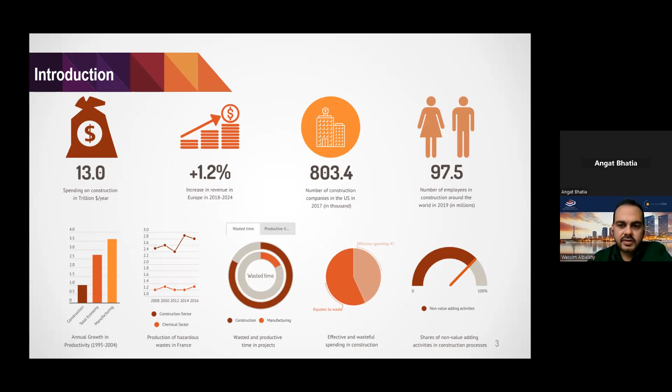So the construction industry, as everyone knows, is one of the most important industries in the world, employing more than 97 million people around the world. However, the industry itself is suffering from different problems related to low efficiency levels, the large amount of waste, and the negative environmental impact. For example, in this graph, you can see that the construction sector produces more than double the hazardous waste of the chemical sector in France, and more than 50% of the time and cost in construction goes to wasteful activities.

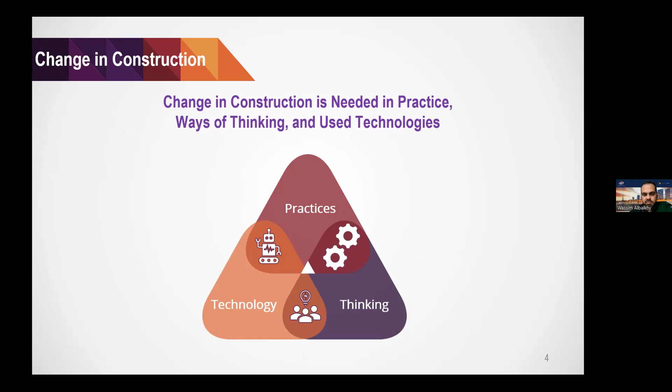Therefore, there is a need to change the construction industry in different ways: in the practices, in the way of thinking and managing processes, and in the use of technologies. These days, we are witnessing the increase of Industry 4.0 practices, and we are witnessing lean construction and 3D printing gaining popularity as two practices that may revolutionize the construction industry.

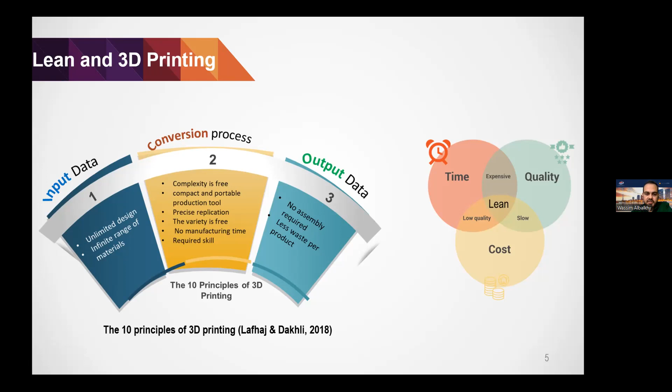From one side, 3D printing is expected to provide benefits to the industry by providing flexibility in the design, the possibility to incorporate different types of materials, and potential to decrease cost, time, complexity, and maintenance work in construction. In turn, lean is known for its potential to decrease cost and time, improve quality, achieve higher client satisfaction by creating value for the client, and achieve continuous improvement.

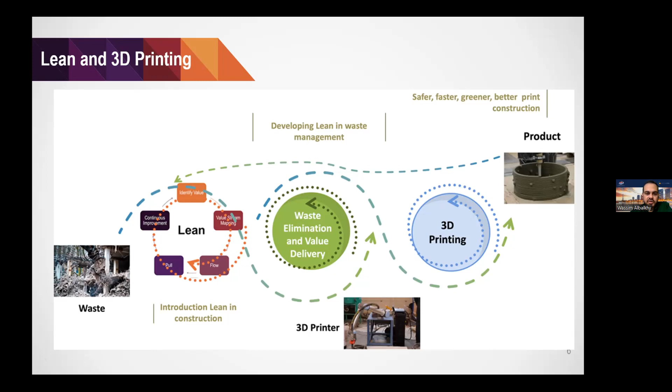In a previous study, we proposed a framework to integrate lean and 3D printing in the construction industry. We thought that both concepts can integrate with each other and benefit from each other. For example, 3D printing in comparison to conventional construction practices can help reduce a large amount of waste, while at the same time, lean can also contribute to achieving safer, faster, greener, and better 3D printing processes.

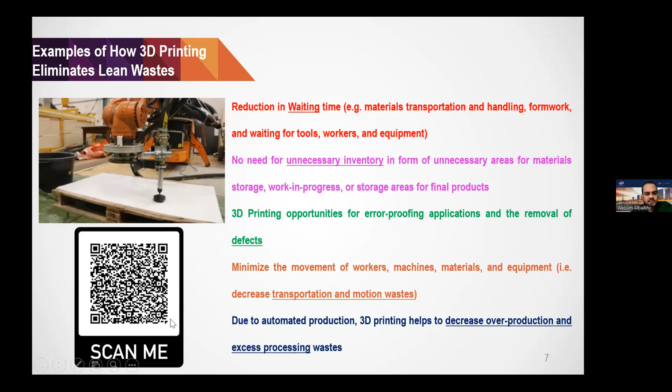In that study, we proposed different examples of how 3D printing eliminates lean waste. For example, how 3D printing in comparison to conventional construction can reduce waiting time, the need for unnecessary inventory, errors and defects in production, and minimize unnecessary movement and unnecessary transportation of machines, materials, and equipment. The study has different examples, and you can access it by scanning this code.

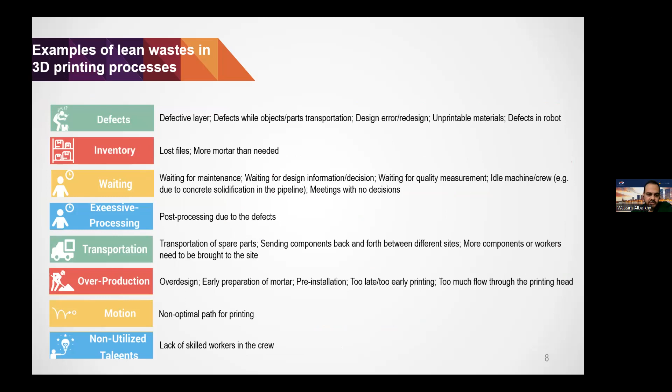In the same study, we also proposed potential lean waste that can be found in 3D printing processes. For example, defective layers, lost design files, the need for post-processing due to defects, over-design, too late or too early printing, and a non-optimal path of printing. So apart from our previous study, the topic of the integration of lean construction and 3D printing is overlooked in the literature, and we could not find enough studies about the analysis of lean waste that may appear during 3D printing processes.

Therefore, this study aims to analyze lean waste in 3D printing processes. And it is worth mentioning here that this study is based on lab investigations, and this is one of the limitations of this study.

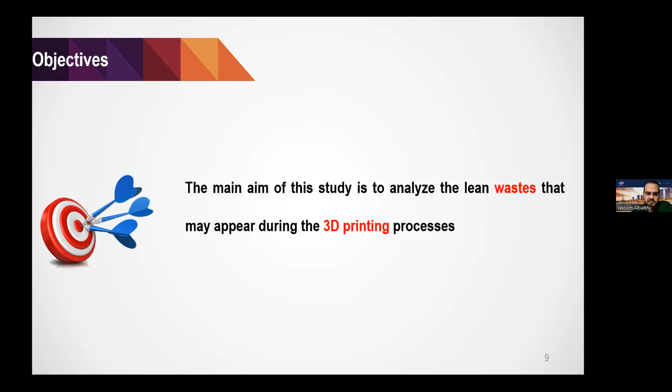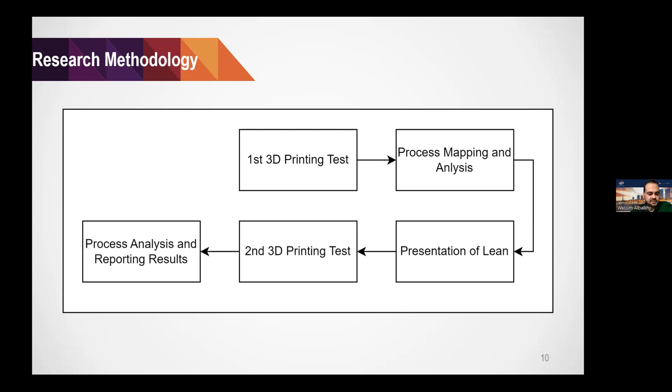The study was based on this methodology: first conducting a 3D printing test for a printed object, then mapping the printing process and analyzing it to identify the value-adding and non-value-adding activities. After that, we presented the concept, the philosophy, the principles, and the practices of lean to the 3D printing team. Then we conducted another test, mapped the process and analyzed it again, and compared the results between the two tests. The printed object was the same for the two tests.

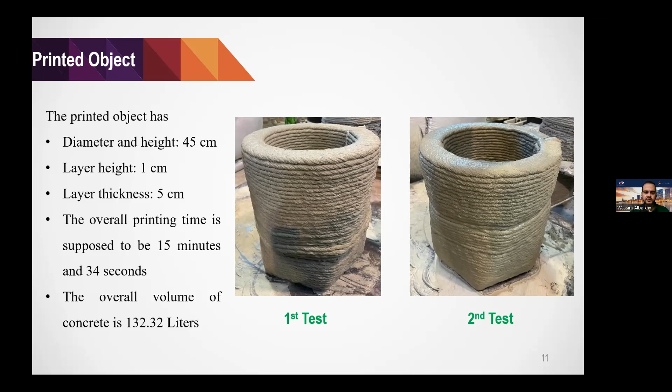It was concrete 3D printing using this shape, which has a diameter and height of 45 centimeters, a layer height of 1 centimeter, and a layer thickness of 5 centimeters. The overall printing time was supposed to be 15 minutes, meaning only the 3D printing when everything is ready and there are no stoppages in the process. The overall volume of concrete was 132 liters.

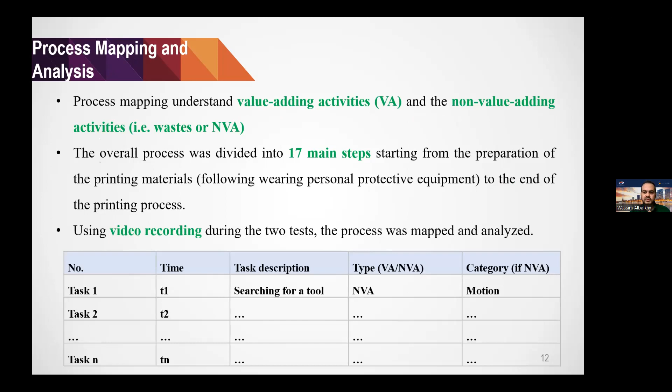The process was mapped using this structure, based on video recordings of the two tests, identifying each task during the test, whether it is a value-adding or non-value-adding activity, and then the type of the activity itself. The results from the first test showed that the test was conducted in 46 minutes, including the preparation of the material, and around 24% of the time was wasted on non-value-adding activities.

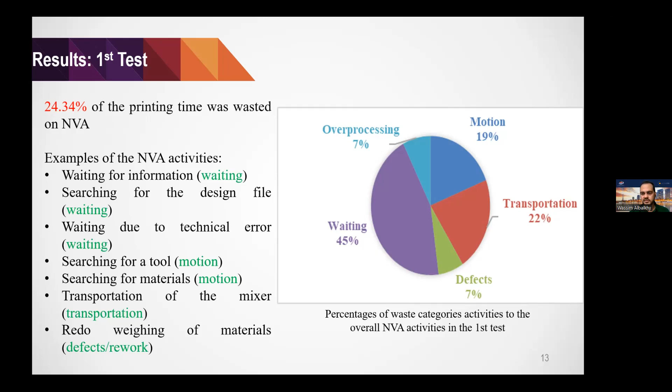Examples included waiting for information, searching for the design file, waiting due to a technical error, searching for a tool, transportation of the mixer, and weighing more than once. The most frequent non-value-adding activity was waiting, then transportation and motion.

Following the first test, we introduced lean principles and lean tools to the 3D printing team. We presented some lean practices such as 5 Whys, value stream mapping, 5S, plan-do-check-act for continuous improvement, visual management, predictive maintenance, and error proofing.

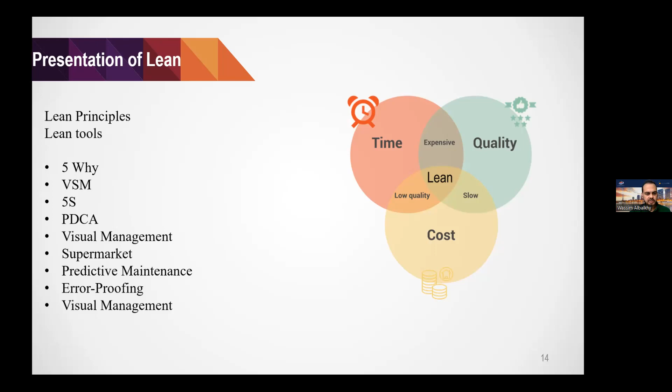Then we conducted the second test. After doing some preparations for the test and introducing the lean principles, the time was reduced by around 3 minutes, and the non-value-adding activities were reduced to 13% of the overall time. Waiting, then motion, then transportation remained the most frequent non-value-adding activities in this test.

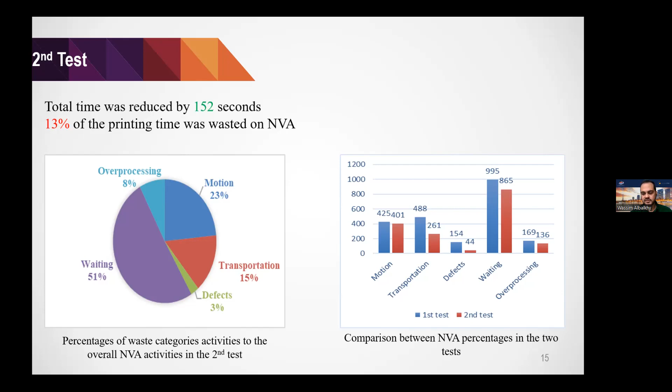In conclusion, lean construction and 3D printing have the potential to revolutionize the construction industry by achieving efficiency, sustainability, and client satisfaction. During the 3D printing, we got around 24% of non-value-adding activities. In comparison to conventional construction, this percentage is low. However, the introduction of lean offers opportunities to improve the time and cost of 3D printing.

The contribution of this study is that it presents an example of employing lean and lean thinking to improve 3D printing in construction. It also serves as an example of how to analyze waste in 3D printing processes.